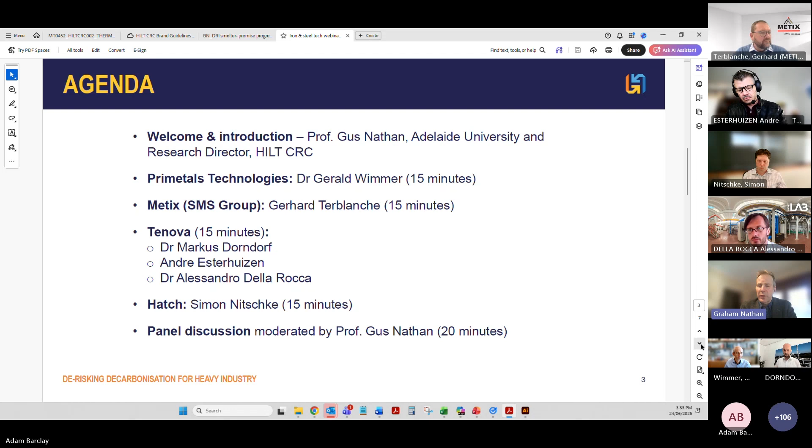Next slide please, Adam. First of all, Dr. Gerald Wimmer from Primetals, and you see that he's a very experienced presenter - we're great to have him here. He leads their work - he's the Vice President of Steelmaking, and he leads their work on green steelmaking, smelter technology. His expertise is in development, implementation and optimization of these processes throughout this field. He's previously held the position of Head of Technology. He holds a PhD in mechanical engineering and a master's in business administration. So please, Gerald, thank you, and over to you.

Thank you for the nice introduction. So I'm allowed to start this session. I'll share my presentation with you - just give me a short sign if it's okay, and you can see it in full screen mode in a minute.

Thank you. As I'm starting this one, I would like to start a bit with a broader picture of why we are doing all this. We are changing our industry, we are going green. So this will not be a small step - this will be a big step. That's why we call it a transition. So we have the green transition upcoming.

You might remember that some 5, 6, 7 years ago we had digitalization and Industry 4.0. Some people are wondering what's happened with this topic - was it completely washed away by the wave of green projects we are doing? We do think it's not the case. So we will have both - we will have a greener industry and a more digital industry. That's why we call this the twin transition.

And that's what I would like to present to you in the next 15 minutes. But to start with, and to start the session, I think it's worth going a bit deeper and having a quick look at the overall picture of our industry.

Why we are doing this. The reason you can see on this slide, on the very first line, we see the typical way how steel is made today.

Today, globally, 70% of steel is made via the so-called integrated route, using material preparation steps like a coking plant and sinter plant, and then the blast furnace to transform the iron ore. Australian iron ore plays a major role here, into hot metal, which we then refine in the converter to crude steel.

We need a lot of energy for this, and in this route almost all the energy comes from carbon. We feed the blast furnace with a lot of carbon, on one hand for reduction, on the other hand for heating. We collect the off-gas and convert it into electricity that powers the plant, so we hardly need any external electricity in a modern integrated plant.

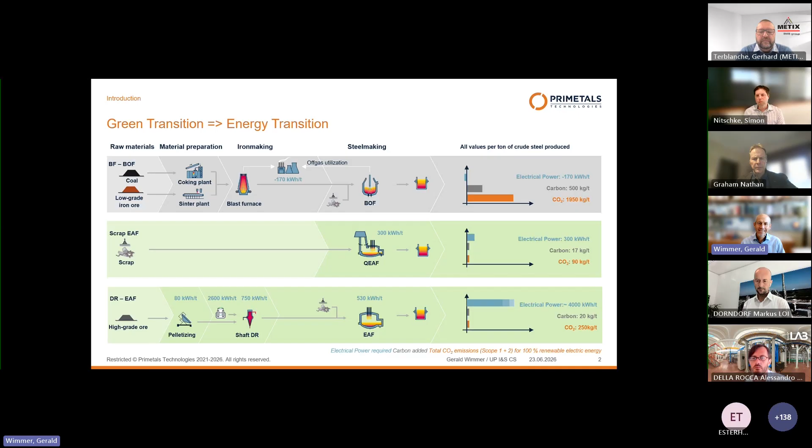So it seems pretty clear. We use as much scrap as possible, and the rest we do via direct reduction using common shaft technology feeding the electric arc furnace. Yeah, it's not that easy. If we have a quick look into the raw material side, here's a typical diagram. Primetals has been using this for quite some time, so you might already know it.

So we see here the global produced iron ores, transported ones, 1,500 million tons a year, an incredible amount. And you see on the vertical axis the iron content in blue and the gangue content in yellow. And of course, the gangue in the classical route using the electric arc furnace is becoming slag. So the higher the gangue content, the higher the slag amount.

And we see the very good iron ores here on the right with very small gangue result in reasonably low slag amount in the electric arc furnace, so the electric arc furnace can handle it. Nobody's happy about too much slag because slag in the electric arc furnace is reducing the yield, it costs energy, but as long as this amount is low, we can live with it and we can use it.

These low-grade iron ores and these medium-grade iron ores would result in very high slag amounts, 600 kilograms per ton. So the slag pot on such a furnace would be bigger than the steel ladle. And that's why these medium to low grade iron ores today are used in a blast furnace and they do not fit the electric arc furnace.

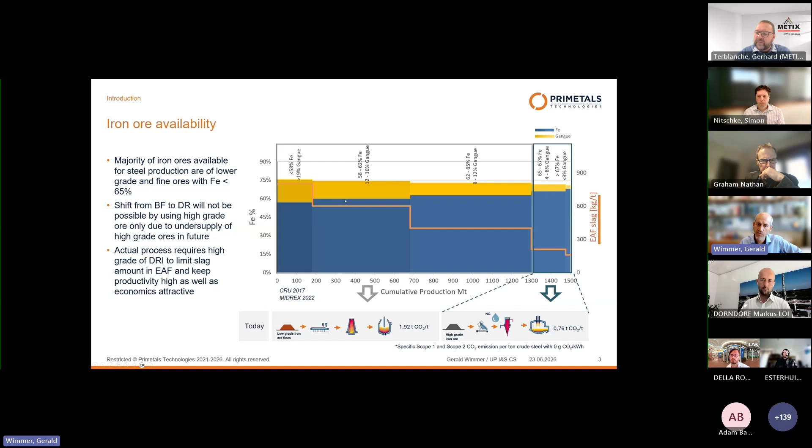And that's also explaining why this topic is so important for Australia, because most of the Australian iron ores are somewhere here. So today they fit very well to the blast furnace. They struggle to fit the common electric arc furnace.

That's why we have these new technologies under development where we use a furnace for low grade iron ores, but not an electric arc furnace, a new type of furnace. Primetals is calling it smelter. Others are calling it electric smelting furnace, ESF, or OSBF, open slag bath furnace. All fine for me. Let's see if we can agree on a name in future.

The only name we do not like to hear is submerged arc furnace, because with this highly metallized DRI, it's not possible to submerge the arc. You will create a shortcut and delete the arc. And with this very simple furnace where no metallurgy is done, we run on low basicity. We can also process these mid-grade to low-grade iron ores with a much lower slag amount. So slag amount stays reasonably low.

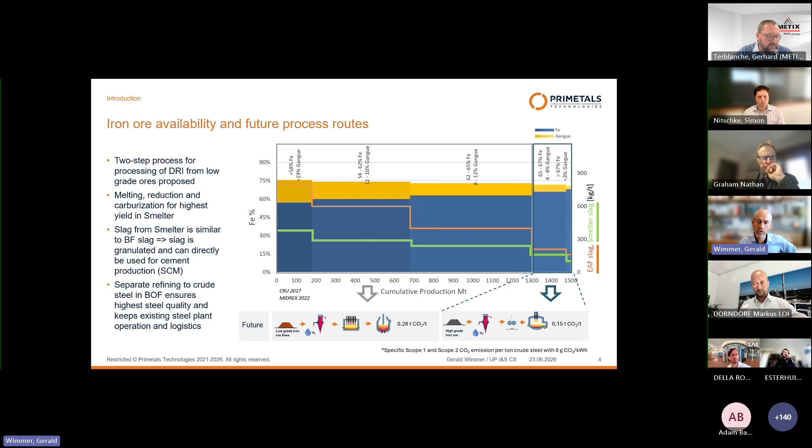And as this process in this furnace is very simple, we just do melting and final reduction. This slag is very comparable to blast furnace slag. So the slag still can be used in the cement industry and we do not get the problem of landfilling. So that's why the future green transition will not only include the classical route already known today and very successfully used in a lot of plants. Primetals is doing just one of these plants in Germany for Dillingen, Midrex shaft technology and modern electric arc furnace.

We will also need technologies that allow us to use low-grade iron ores, which is the majority of iron ores available today. And this requires this new type of furnace, which is a simple furnace just doing melting and reduction. No metallurgical refining work, and all the refining work we do in a dedicated aggregate, the BOF converter. And this also explains why this route with these two steps, smelter plus BOF converter, is very interesting for plants already having a BOF converter in operation, and especially plants having very large heat size that is not that easy to transfer to electric arc furnace, like for example POSCO, ThyssenKrupp or the Japanese plants.

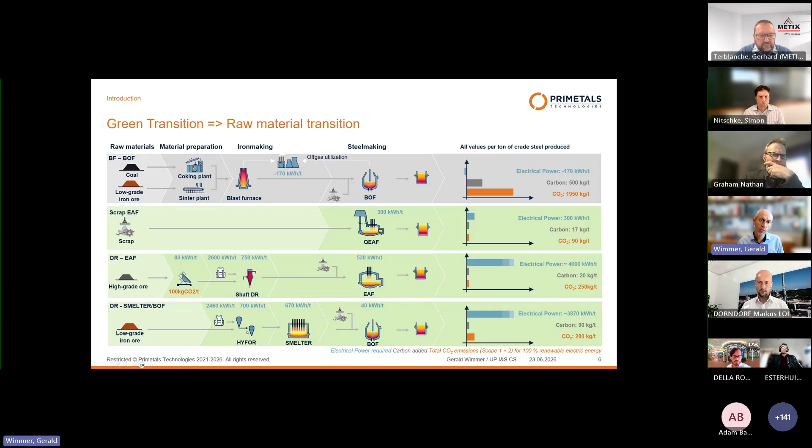And of course, there is further development. Why do pelletizing? This is again energy and CO2 emissions. Is there also a solution to do direct reduction without pelletizing? And here, this new fluidized bed technology developed by Primetals Technologies, HYFOR, is under development. A different way to show this green transition is summarized here.

So on the very left, we see the classical route where we have the material preparation. Then the blast furnace is a very busy guy. In the blast furnace, we do the reduction and the melting and then refining in the converter. While in this very new route, we eliminate the preparation step. We directly go to fluidized bed with the sinter feed without preparing it.

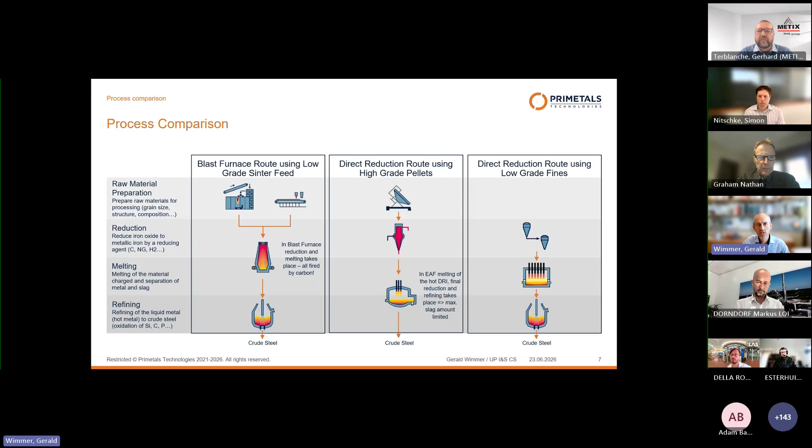And then we split. Instead of having one electric arc furnace that is doing melting, final reduction and refining, we split into two steps. So we have this new furnace, which is called smelter, for melting and final reduction. And we get metal high in carbon, which we feed then into the BOF converter for refining, so a two-step process in the steelmaking. That's the future process we think for Australian iron ores will play quite an important role. And that's then our prediction.

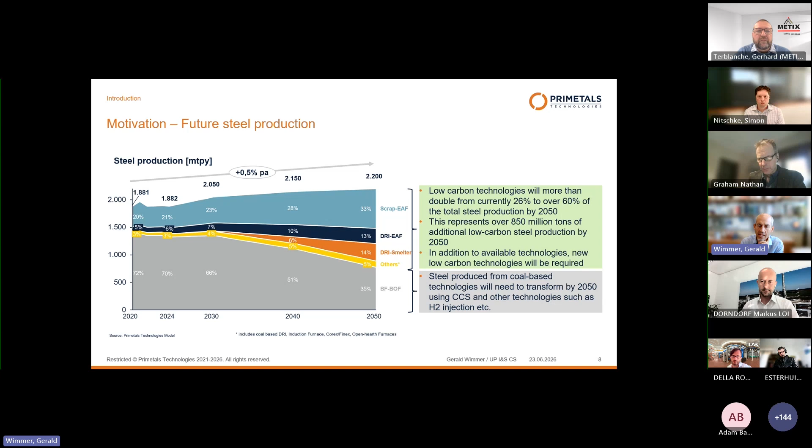and the rest will be based on DRI, where we have this classical route using high-grade DRI going to electric arc furnace and the other ones going to the smelter, plus some new technologies which are on the horizon. For example, electrolysis, high temperature, low temperature electrolysis, but here it's not yet proven to which scale this technology will ramp up. Quick outlook how Primetals is developing. So we have 4 processes under development.

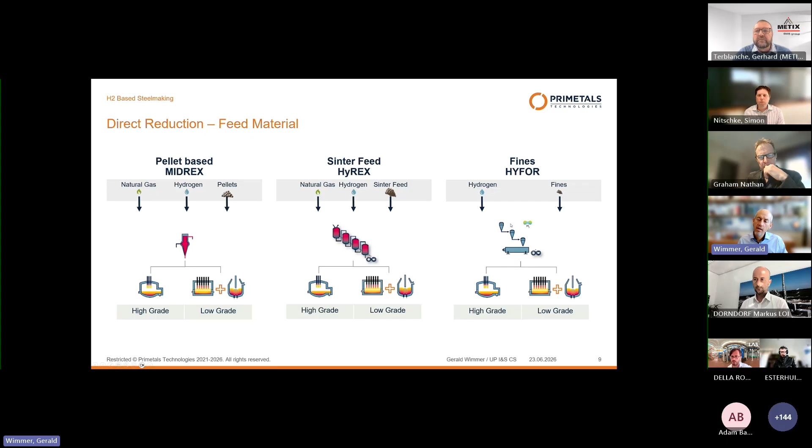Let's start with the HYFOR, where we combine direct reduction step using this new fluidized bed, where we use ultrafine material as an input. So very fine material with a grain size of less than 500 micrometers. Several reactors, material is reduced, and then we either compact it, hot compacted iron, or we directly feed these fine materials into the smelter, and from the smelter we get metal high in carbon. That's why we call it hot metal or iron, and a slag which is granulated and sent to the cement guys.

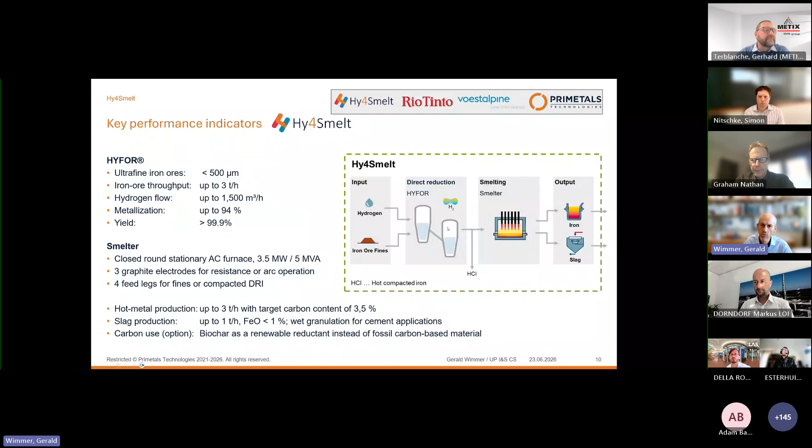And for this combination of HYFOR direct reduction plus smelter, we started a project called Hy4Smelt, which is financed by Primetals, voestalpine, the steel plant next to my office here, and Rio Tinto. So why is an Australian mining company investing in a demonstration plant just to prove Primetals Technologies processes? Because this will show that Rio Tinto's Australian mid-grade iron ores can be processed in such a route in a green way to produce green steel.

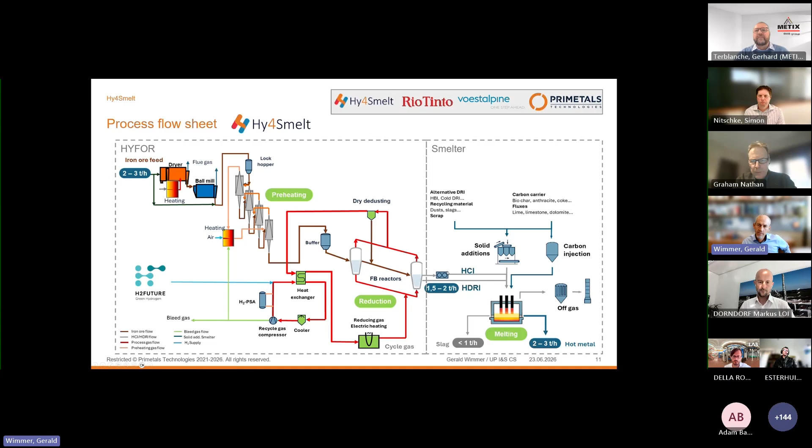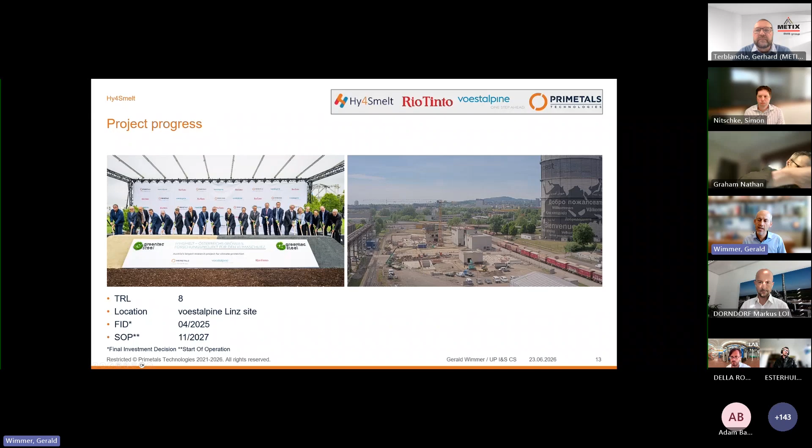Quick overview on the process sheet. So first step, of course, is material preparation. One minute, please. Preheating, and then we go to the smelter. The smelter is already known to the industry now. Just a quick representation how this looks. So it's a big furnace having a bath, which is continuous, and we continuously operate and tap it like a blast furnace. And this is now the realization. We had the groundbreaking last year. In wintertime, we prepared the land, and now the civil works are under execution. And we're now raising the building up, and first columns are going to be placed this week.

I mentioned digitalization. So it's not only green, it's also getting digital. Why? Because in all these plants where we have this new route, process in the first step is getting more complex. So we have a new process route in parallel to your old one, which is an advantage if you can use it well. If you cannot control the process well, then it's just a nightmare and a chaos.

And second reason is, when we do a new plant, a digital plant is less costly than an old plant with a lot of hardwired control boxes and control panels around. And that's why digitalization in the new plants automatically plays a role. One of the topics I like most is this mobile information support systems, where you have mobile devices.

Gerald, we just need to draw it to a close soon, please.

Yes, just coming to an end, where we have all this information then on the tablets available for documentation. And we will start up this Hy4Smelt plant next year in November, and hopefully in the next seminar I can then present first results.

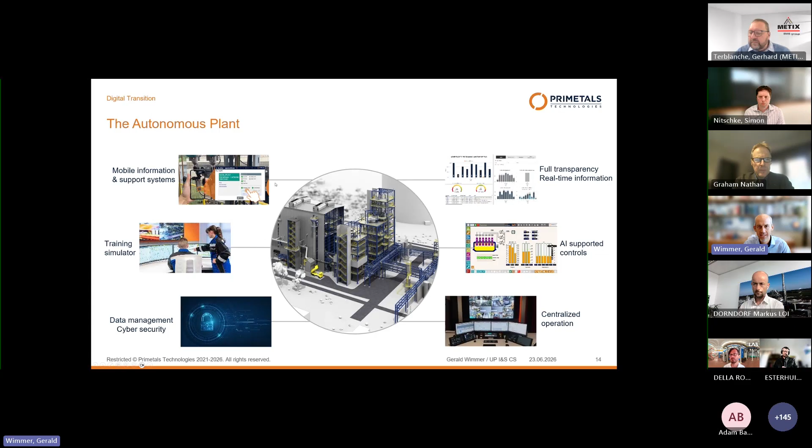So now we hand over to SMS Group, where Gerhard is going to give us perspective from Metix. He's a business development manager who started his career at Xstrata Alloys in 2001. He's had expertise in ferrochrome production-related activities, pre-oxidation and process understanding, extensive experience in AC/DC furnace operation, been in Metix since 2023, and he also graduated from South Africa in chemical engineering.

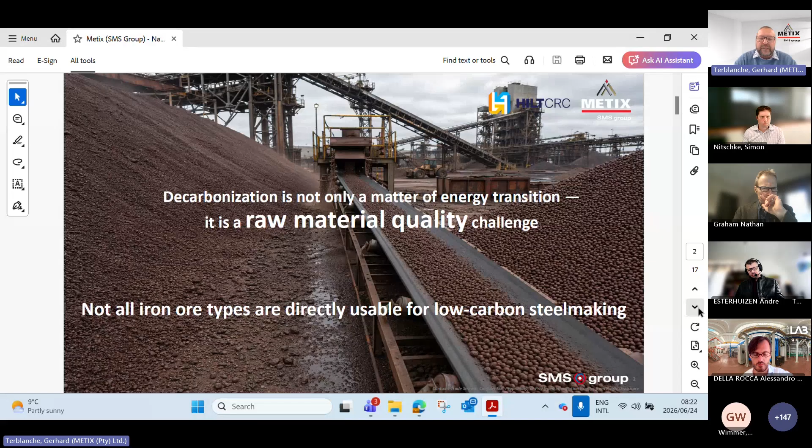As we all know, decarbonization is not only about energy, it's also about raw material quality, which is the challenge for most companies. However, we do see it as an opportunity. Not all ores are suitable for low carbon routes, especially the DR-EAF routes. There's an increasing reliance on high-grade ores or upgraded materials, especially with the EAFs recently being built and commissioned. The industry is shifting from energy only to energy and feedstock optimization. It's clear how Metix and the SMS group fits into this, but we'll get to that a bit later.

So what is the present situation? We all know that the steel industry is volume driven. It has been like that since the beginning of the steelmaking process, volume driven with flexible feedstocks. Mostly it was dominated by the BF-BOF route with a wide tolerance for different ores. The value chain was built on scale and logistics efficiency, and there were limited historical constraints on ore quality. However, we've seen significant change in that.

Considering the present situation, we need to understand what the future holds to design and supply the right equipment to fill this gap and the right technology to fulfill these processes. So the transition to energy and emission constrained systems, the growing role of hydrogen and electricity, as was also mentioned by the previous speaker, the preference for high-grade ores and scrap, although availability is getting less, and we'll see that on a graph similar to what was presented earlier. And also there's the regionalization of steel production.

So it's important to understand that you cannot just have one technology for all regions. It depends on what happens in that region, and on what the requirement is for that specific region and that specific client.

So the impact of transformation. I already discussed the shift to an emission-driven production model, which means low carbon or decarbonization. Obviously, this brings increasing OpEx and complexity. The margins in steelmaking and ironmaking are not as favorable as in other commodities, so OpEx plays a very important role. And then processing moves toward energy-abundant regions, where there's low-cost electricity; that's where the process fits in perfectly. And then there's a disruption of the traditional value chain, as we've discussed under the present situation.

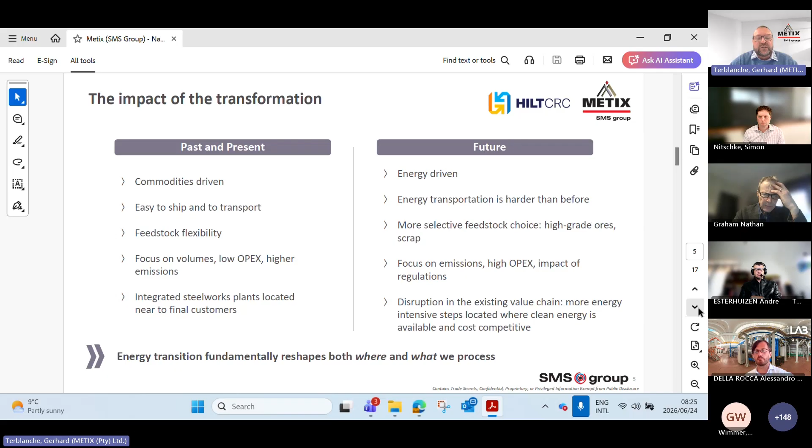So considering all of this, you need to understand what technology to apply in what region to decarbonize efficiently, while still looking at the right OPEX as well as the right CAPEX. As we go forward, you'll see where the SMS group and Metix fit perfectly into understanding the regions as well as what technology to apply where.

So in terms of global trade flows and the quality shift, as you can see from this graph, iron ore supply is highly concentrated from Australia and Brazil, while demand is dominated by China. We've seen that many times. High-grade supply remains constrained despite the growing demand, as you can see on the graph on the right, and that was also indicated by the previous speaker.

The market is not volume constrained, but quality constrained, and there's a structural gap emerging. That gap we need to understand, and that's the gap we need to fill with new technologies and new pathways.

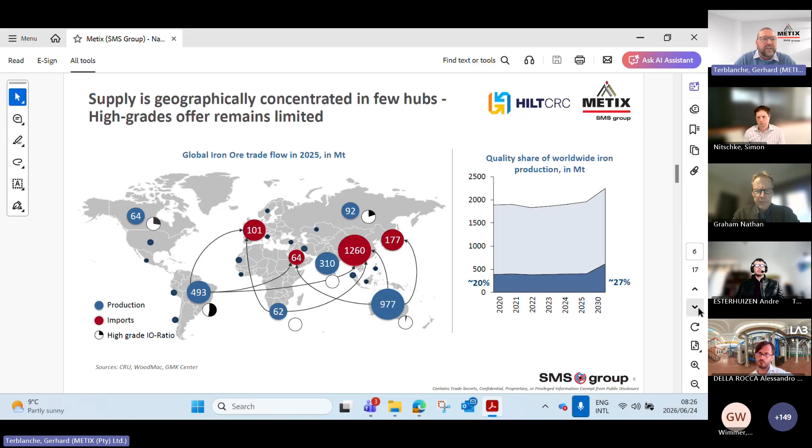Now, interesting enough, total production does grow modestly in terms of ore, but high-grade demand grows faster. DR pellet supply remains structurally limited, and that's a big bottleneck for the DR EAF routes. There's a clear mismatch between decarbonization demand and feedstock availability. Keep that in mind when we start looking at what technology to apply and how to apply it.

The nice thing about Metix and the SMS group is that our technologies are bypassing pellet dependence, especially looking at fines processing and different smelting routes, which we'll also get to a bit later.

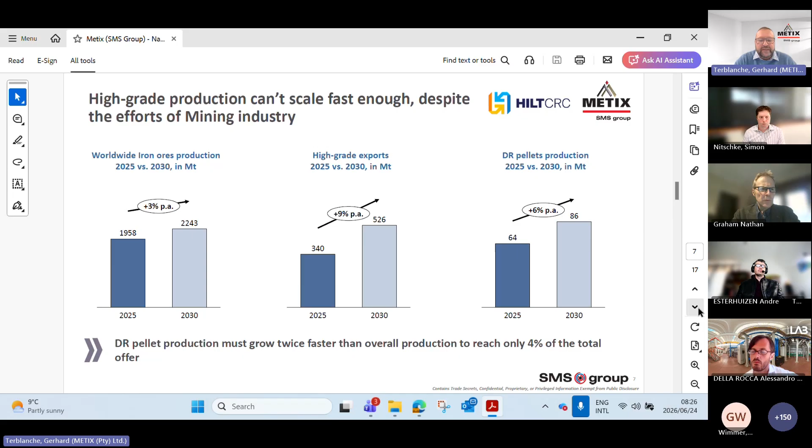Low-grade ores dominate, and we do know that. 80% of the global iron ore is low-grade and still growing in absolute terms. Low-grade exports are declining, which means that we need in-situ upgrading of this material at the source.

Decarbonization depends on unlocking low-grade ores economically. Unlocking a low-grade ore means that it must be economically viable, it must be efficient, and it needs to give you the same product and the same results as what we've seen from the blast furnace as well as the DR grade EAF route.

Good. So what do we have? Within Metix and the SMS group, there are different routes, as also discussed by the previous speaker. These three routes are the scrap EAF, the blast furnace BOF, and then the pellet-based materials, which we know can be high grade or low grade. So what Metix, as part of the SMS group, did is differentiate our offering across different routes.

We have the OBF, or open bath furnace, and yes, as the previous speaker indicated, there are different names for this. However, we do refer to it as an open bath smelting or open bath furnace, OBF. This OBF is a reducing furnace which uses electricity, but from this furnace we can produce the exact same hot metal and slag which comes from a blast furnace, which means it fits seamlessly into the current processes to replace the blast furnace.

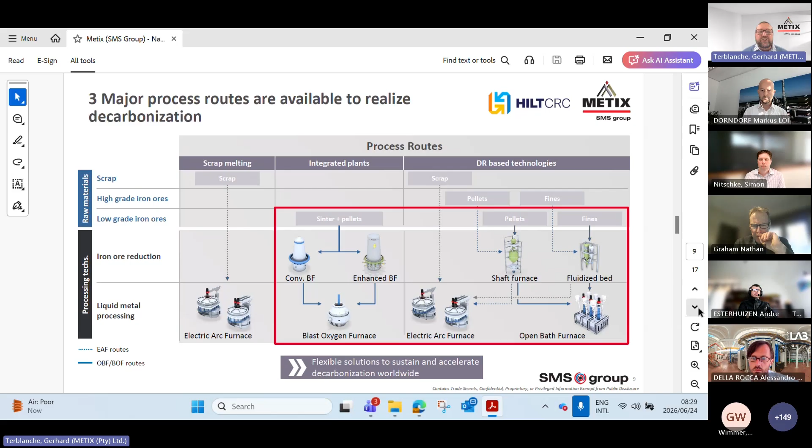Now, this is an important slide. Why do I say that? Because every region has a different drive. It's important that Metix and the SMS Group, as technology suppliers, understand what to do in what region. So there's no global optimum.

For Europe, it's cost and policy driven, as we know. For the Middle East, it's energy driven with a lot of DRI growth. China and India, we all know the BOF still remains dominant. And then energy and ore dictate competitiveness.

So from the SMS Group and Metix side, we have successfully de-risked each region to understand what technology to apply where. And again, within the group, we've also developed PAT, a plant assessment tool, which can assist you very quickly to make a decision in terms of OPEX of where to build what technology.

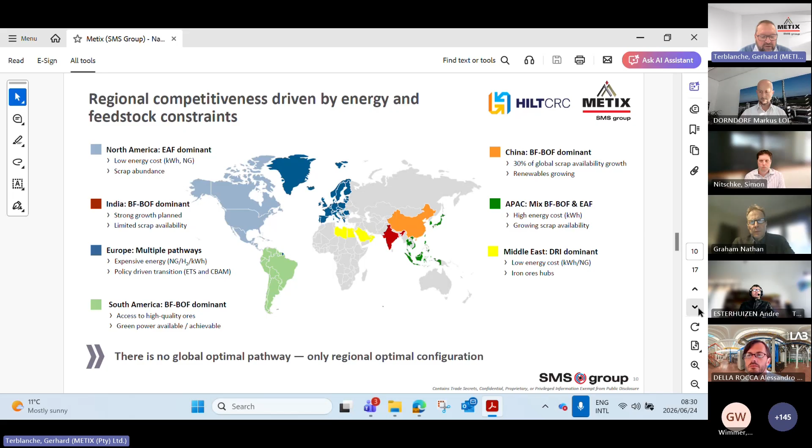Low-grade ores must be leveraged, and Metix has successfully developed our open bath furnace to utilize low-grade ores, also in a fine format coming from a pre-reduction unit, which is the CircoRed. There's also additional value from bypassing agglomeration, which is CapEx and OPEX intensive.

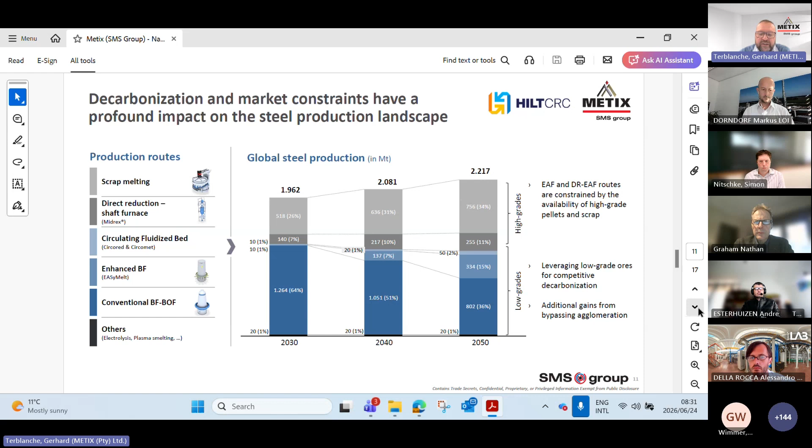Good. So, not to waste any more time, as I only have about 4 minutes left — what's quite key for SMS and Metix technology, and how we differentiate, is our CircoRed product, which is hydrogen-based. The nice thing about our technology is that it has been de-risked, the process up to TRL7 on our smelting capacity. We've done significant test work already.

Our pilot scale work has been completed. Our equipment is sitting on TRL9. On the CircoRed, which is a hydrogen-based fine pre-reduction unit, there are also references which you can go and look up. There's a reference plant which has been built in Trinidad.

So the product that we have is the CircoMet, where we have a one-stage fluidized bed reactor combined with our smelting furnace. Again, it's a bespoke and tailored solution which is already developed, and it will be per region and per client request. We normally don't just give one solution to everyone. So the CircoMet is available and de-risked.

And then also the CircoRed, which can be a two-stage fluidized bed process, also part of the SMS group offering, where you can feed from this to create an HBI or a DRI, which can be directly used in an EAF. This means we can utilize high and low-grade ores and feed into an EAF or into a smelting furnace, depending on the requirement of that specific client.

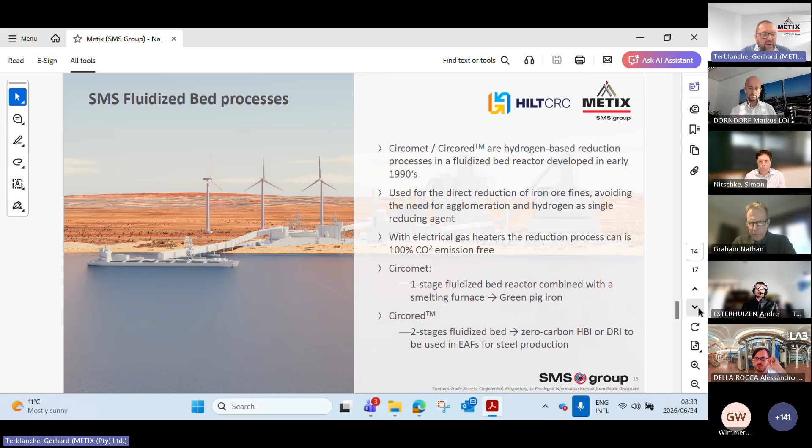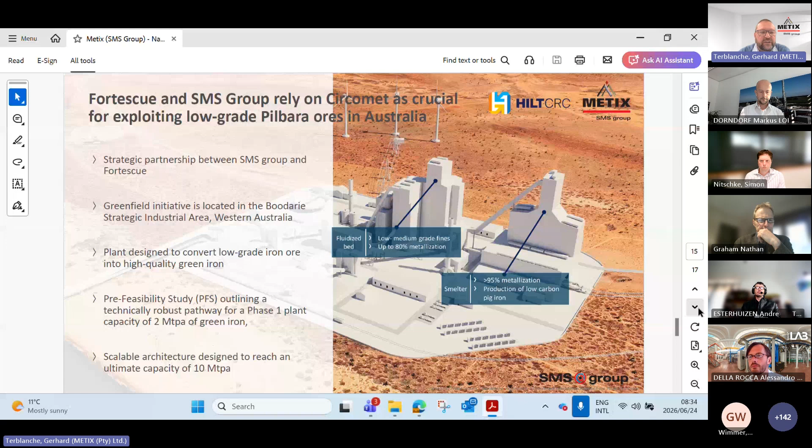So in conclusion, there's the market shift — it's quality, not volume, and it's a real constraint. Decarbonization requires integration of low-grade ores, clean energy, and flexible technologies. There's no universal solution, and Metix and the SMS group, as said earlier, design according to the region to have an optimal decarbonized solution with already de-risked equipment.

And this enables us to supply technology across the whole value chain, enabling low-grade ore to green metal pathways. Good, so that's from my side. I think I am within my 15 minutes.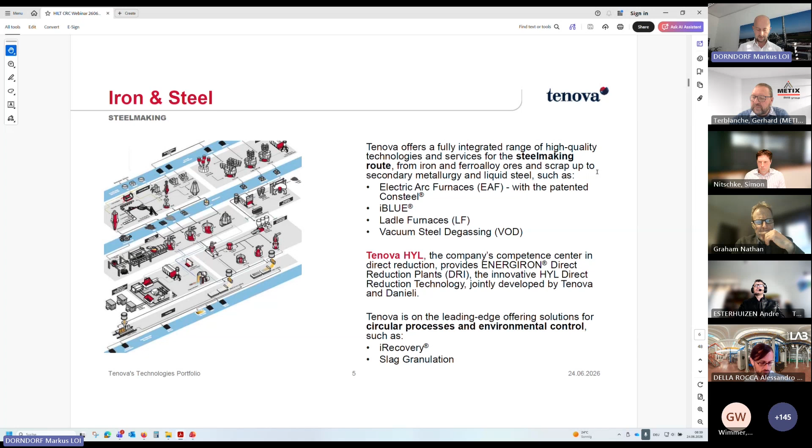Especially for the iron and steel making industry, Tenova offers a fully integrated range of technologies that supports the transformation of the integrated route towards green and sustainable production, especially from iron ore and ferroalloy ores to scrap and to secondary metallurgy and liquid steel solutions. We have different types of electric arc furnaces in our portfolio, an iBlue concept my colleague will refer to later, and also post-processing solutions for ladle furnace and vacuum degassing technology. We also have our own direct reduction technology, which I'll show you in a minute, and as said, our port equipment and bulk material handling is also part of our expertise.

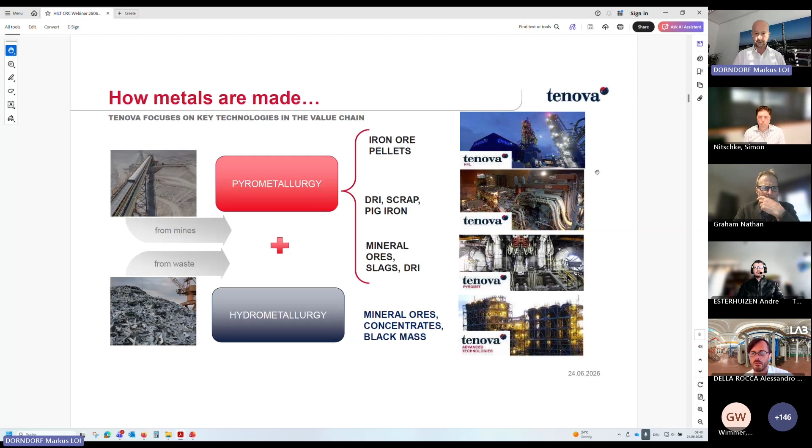As for how metals are made, I think all of you know about that. We have the ores, which need to be pelletized in order to use in our direct reduction technology. Under the big umbrella of pyrometallurgy, we also have solutions to deal with all iron units available, especially scrap, pig iron, and DRI, which we can produce ourselves. Another part of that is from waste hydrometallurgy, where we can create concentrates, mineral ores, or battery recycling, what we call black mass.

Where in the steel value chain can Tenova contribute to mitigate the carbon footprint? That's why we are so active in the decarbonization of the steel industry worldwide. With our direct reduction technology, we directly have the solution in hand to do CCU and CCS, but the main approach is to avoid CO2 emissions, what we call CDA, carbon direct avoidance. We also have a lot of technologies in waste heat recovery and injection systems. All of them are hydrogen ready, so we are already prepared for the far future when hydrogen will be available to a great extent.

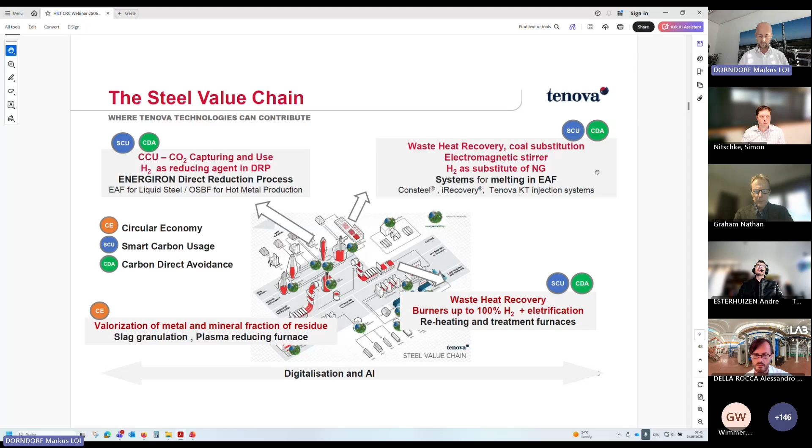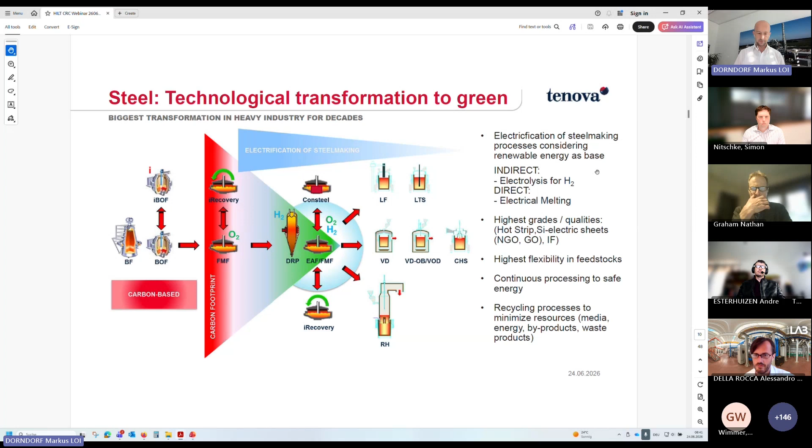This is what Gerald and Gerhard already presented. We are on a big path of transforming the steel industry, so we electrify the steel industry. Gerald made a very clear explanation on that, and we have explicitly designed our portfolio to support this electrification of the steelmaking process. These are the main steelmaking routes where we can support you and our customers.

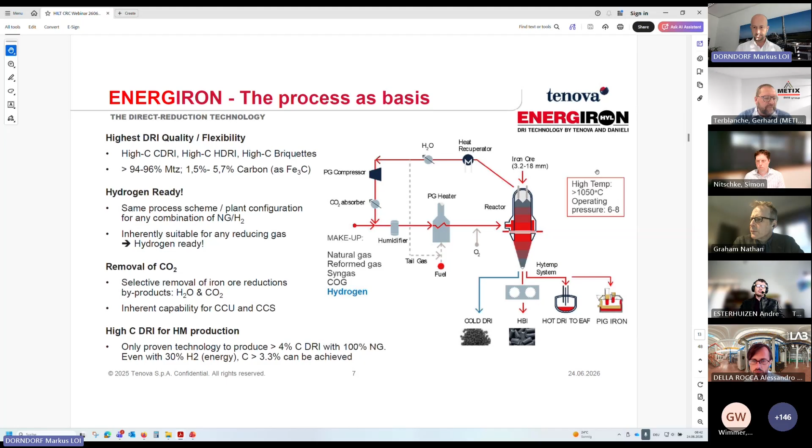We start with the Energiron process, jointly developed by Tenova and Danieli. This is just an overview of this cycle process. It's hydrogen ready, so we can easily switch between 100% natural gas and 100% hydrogen as reducing gas, and also use other reducing gases. This cycle process has a CO2 sink feature, meaning we take out the CO2 in a very pure gas composition, which we can use, for example, in the beverage industry, for a CCU approach.

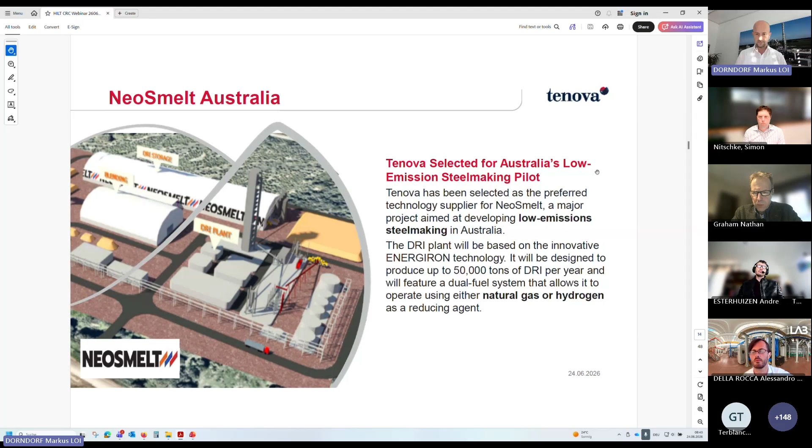That's why we have also been chosen by NeoSmelt. The main goal of this pilot plant, which we call a semi-industrial plant for NeoSmelt, is to test especially the Pilbara ores. Currently we are running a series of batch tests in Mexico, where the HYL mother company sits. With these batch tests using pellets containing Pilbara ores, we would like to better understand their behavior. Also recently, Rio Tinto published that they executed industrial tests in the Zero reformer plant in Baowu, and they are getting good results as well. So this is our contribution already with our DR technology in Australia.

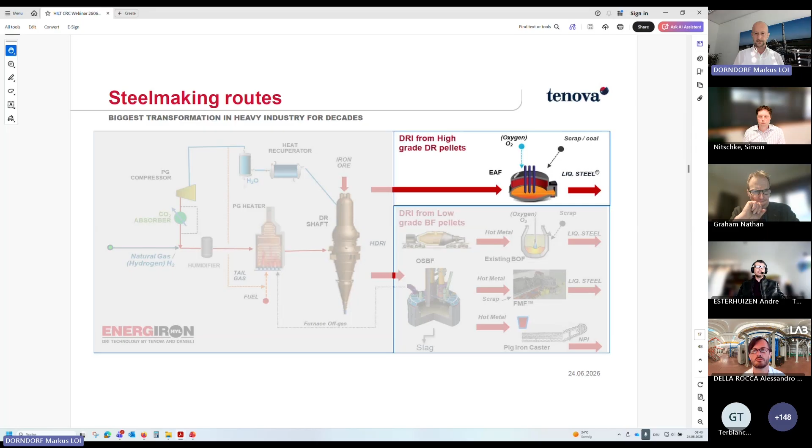As said, we have a wide range of melting technologies and aggregates, and before I hand over to my colleague Andre, I would like to explain a bit more about the electric arc furnaces. We have various solutions and concepts for melting iron-based materials and converting them into steel.

Within a basic top charge electric arc furnace, our main driver in this transformation process, also from the productivity point of view, is our ConSteel solution. This is a continuously fed melting furnace, or electric arc furnace, capable of producing up to 400 tons of liquid steel per hour.

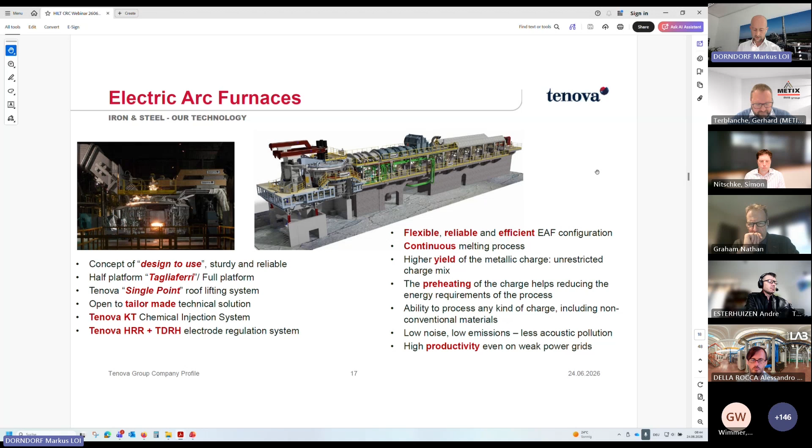With that furnace, we can easily enter integrated steelmaking plants and say: look, we can match the production capacity you ran before with blast furnace technology, and keep up with the electrified solution. We can provide electric arc furnaces with productivities above 2.5 million tons a year. This is a very specific technology we have developed over the last decades.

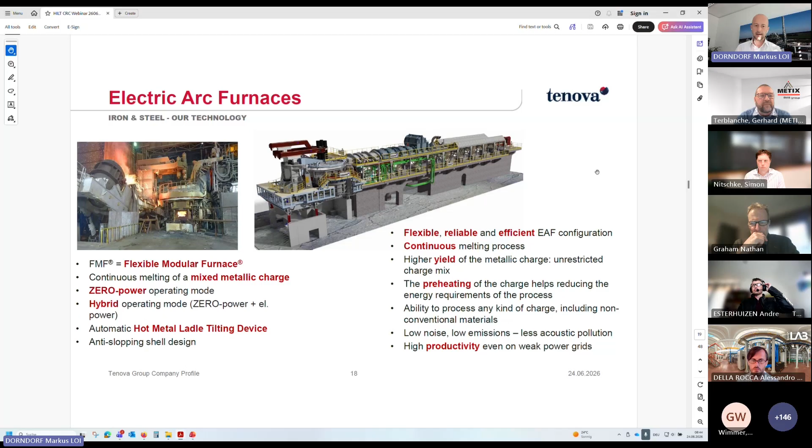But we also have other furnace concepts. For example, the flexible modular furnace, which is a hybrid solution acting as both a converter and an electric arc furnace in between.

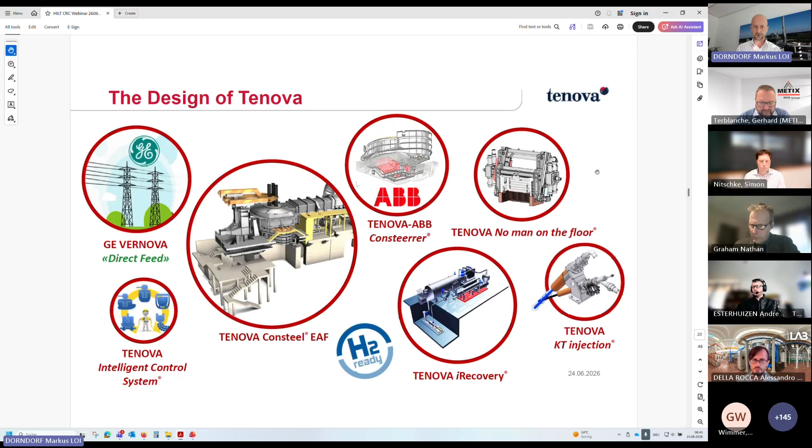As said at the beginning, we are a technology provider, so we mainly focus on the technologies that make this sustainability approach alive and bring us forward. We are very strong in technology, with no man on the floor, hydrogen-ready burner technologies, and also our own electric charging or input concept with the direct feed, developed together with GE.

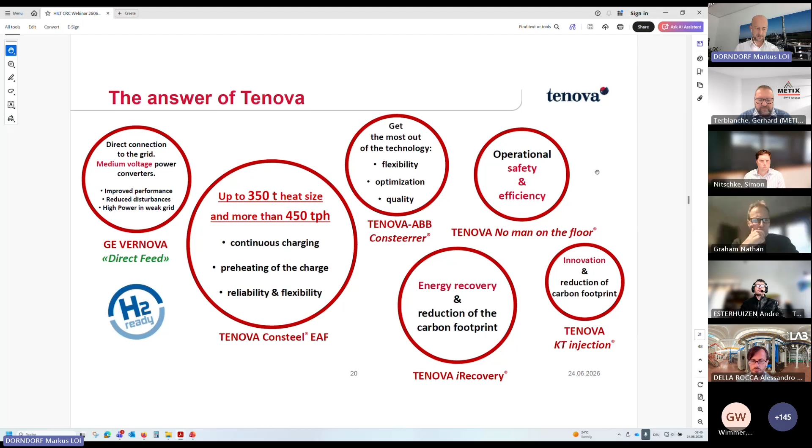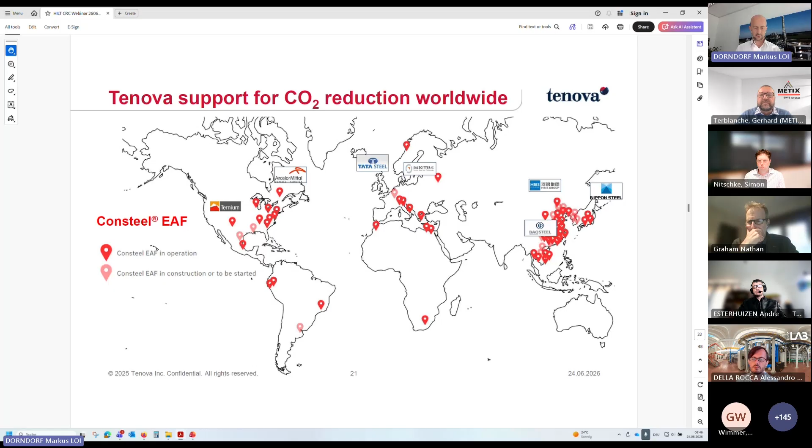This brings us a lot of advantages, especially here in Europe, where we are the main driver for this big transformation process of the integrated route. Our references show the world that this Consteel solution is the perfect match for the transition towards a green steel industry in the future.

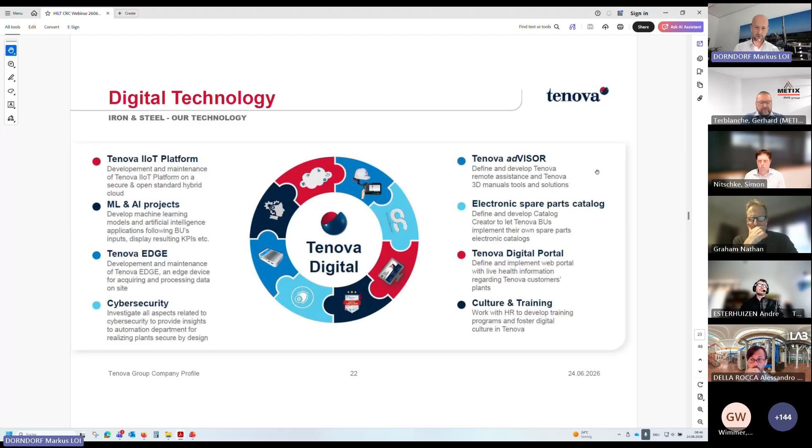But as my colleagues said before, a key aspect is, and will be, digitalization, data analysis, and the usage of artificial intelligence to make our facilities and processes even more efficient and transparent to our customers. We are very active and strong here.

All this together results in the main playing fields we are in. We have a lot of experience, especially from Europe, North and South America, where we drive this green transition. Now I would like to hand over to my colleague Andre, who will give you a more detailed approach to our smelting technology. Thank you very much.

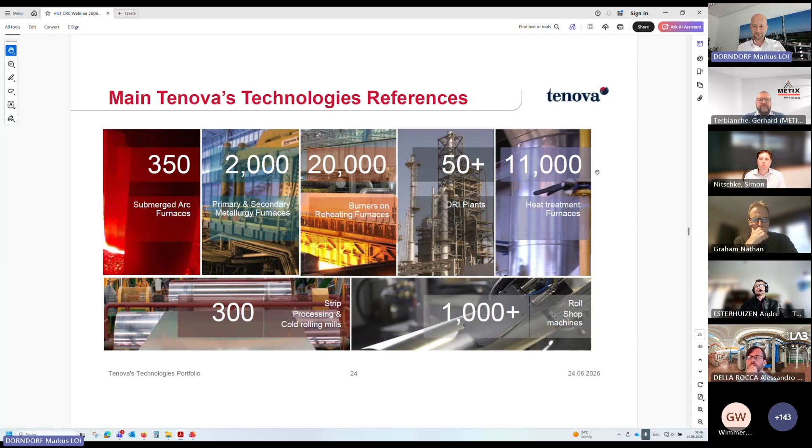I think I have to start off saying, for the audience listening, there is Tenova, Primetals, Hatch, and SMS participating together on this webinar. I like to refer to us as frenemies, because we are extreme competitors, but at the same time we all have this common goal we are working towards. A high tide raises all ships, so we all get along very well.

Now, Dr. Wimmer, Gerhard has explained so much on the long-term primary focus and the challenges the industry is facing. I just wanted to take a short left turn, looking at the timelines my colleagues have shown, where we're talking about 10, 15, 20 years into the future to really turn this industry around. There's also a need for what I call complementary technologies that we need to focus on.

Just two of the technologies I wanted to raise today are slag treatment and HBI or DRI preheating. Markus has explained our experience with direct reduction technology. Electric arc furnaces are shooting up all over the world. Open slag bath furnaces, as an engineer, it's probably the coolest thing I've worked on in my 20 years as a pyrometallurgist, but it is so damn complex and expensive. When we're talking about a market where profit margins are measured in cents per ton sometimes, we really need to tread carefully on how much the new technologies we develop cost.

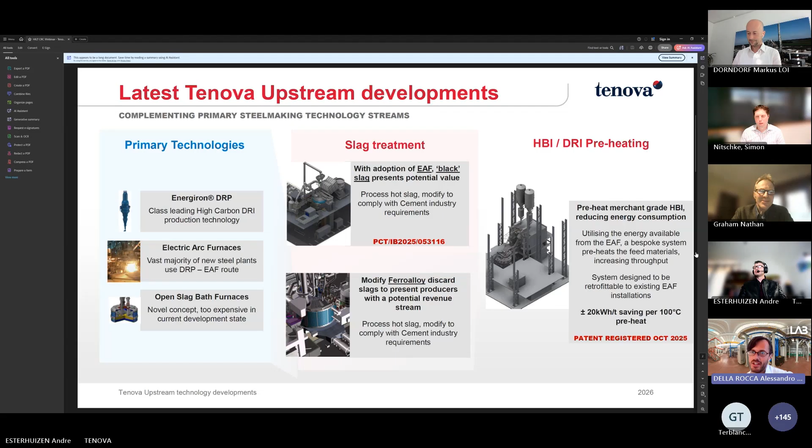Let me finish this overview, giving you an idea of what's coming up next. We talked about upstream liquid steel production. Now it's also a good idea to look into downstream, which means essentially hot rolling of semi-finished products. Tenova has also developed a portfolio of downstream decarbonization technologies for reheating and heat treatment processes, organized into three main areas.

The first one is related to efficiency improvement, essentially having regenerative combustion as well as high temperature air preheating, and possibly high temperature fuel preheating in the case of very lean fuel gases, such as lean blast furnace gases. This may be particularly relevant for getting the first 20% of CO2 reduction.

And then, for further reducing total carbon footprint, there is for sure the possibility of looking into green hydrogen combustion. We have developed a good flameless solution for that. The idea is that the combustion system can be used as a totally flexible user within the hydrogen supply chain, meaning no hydrogen storage needs to be provided on site. We believe this is really a huge simplification, both in terms of insurance cost and safety works required.

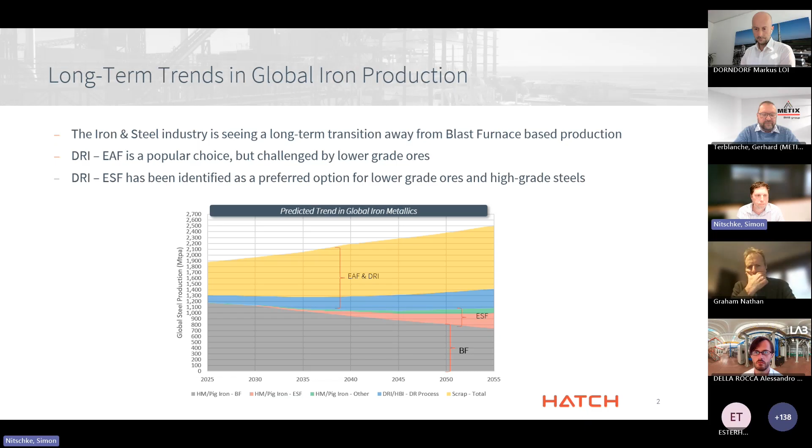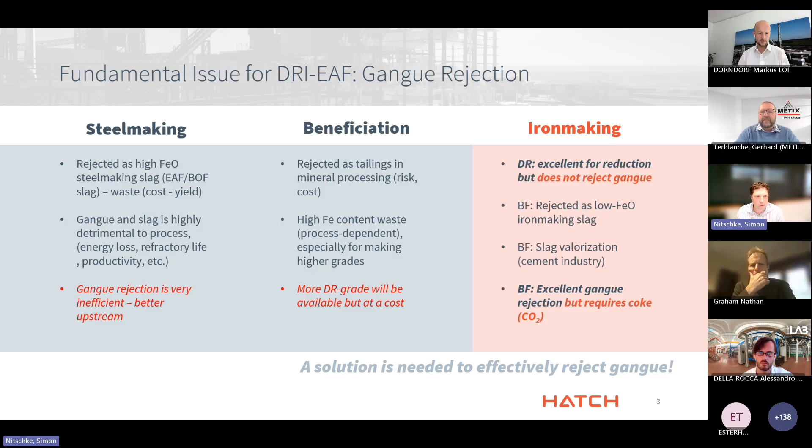Again, the iron making challenge around low grade ore is fundamentally about gangue rejection. We've heard a lot of information about that, so I won't go into a lot of the details on this slide. And in preference, I'll skip to how we in Hatch look at ESFs fitting into this flow sheet. So the good news is that ESFs do provide us with equipment capable of rejecting that large amount of gangue in an efficient manner and at the volumes comparable to blast furnace operations today. And therefore, they really do represent a very credible alternative pathway in the future.

So our teams have always found it useful to see DRI ESF flow sheets as simply splitting the combined pre-reduction and smelting processes that are normally all completed within the one vessel of a blast furnace into those two separate process steps, the pre-reduction in the upstream direct reduction furnace, and then the electric smelting furnace being able to complete that work and achieve the challenge of that gangue rejection that we talked about earlier.

Now, with our experience in designing and building some of the largest electric furnaces in the world today, we certainly recognise the importance of not only the equipment technology itself, but looking at the layout of the smelting facilities and how that integrates into a smelter that's capable of handling the capacities that make it credible for blast furnace replacement. And so we've looked in detail at a couple of different layout options. We see credible opportunities for coupling a single 2.5 million tonne per annum DRI facility upstream of 2 ESF furnaces, or alternatively for even larger capacity throughputs, perhaps 2 DRI units into 3 ESF.

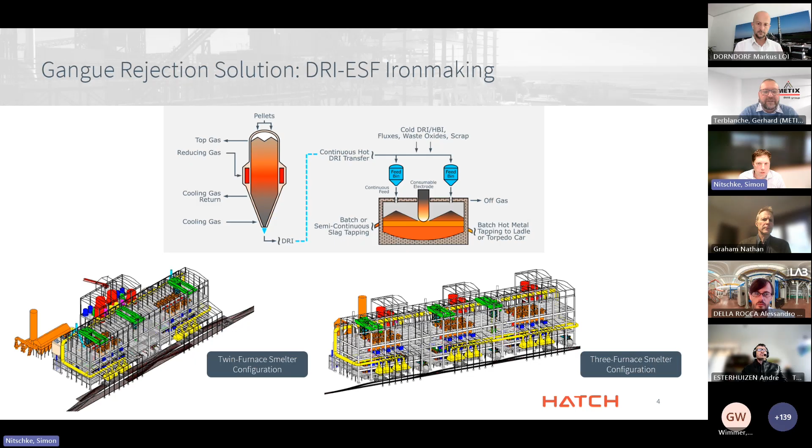Now, in terms of the CRISP Plus furnace itself, the fundamentals of this equipment design are not new. Hatch has been designing, developing and refining the components of stationary, high-powered, large-scale smelting furnaces in the non-ferrous and ferroalloys industries for more than 70 years. Many of those component-level technologies originally developed have direct applicability to iron-making ESFs, and they can benefit from all these developments in the past. And each of these features we've incorporated into the overall CRISP Plus furnace design that we're now carrying forward as our offering in this space.

Now, we see a lot of these component level technologies as very critical to the long-term successful operation of CRISP Plus at scale. And I just wanted to mention a couple of them briefly. We've heard from others about the importance of producing high-value slags, very similar to what comes out of a blast furnace. And that's certainly possible as part of ESFs. Perhaps most importantly is the combination of an active binding system that provides constant sealing on all of the refractory lining in all three dimensions and allows us to thermally cycle the furnace as necessary for maintenance activities and long campaign lives.

We've got tight sealing of that upper gas space above the liquid bath, and that's important for providing a CO-rich off-gas stream and opening up the possibility and value of integrating low nitrogen steel productions out of ESFs. It's continuous operation, as we've mentioned earlier, which leads to high availability and less complexity in terms of integrating into industrial power grids, particularly weaker grids.

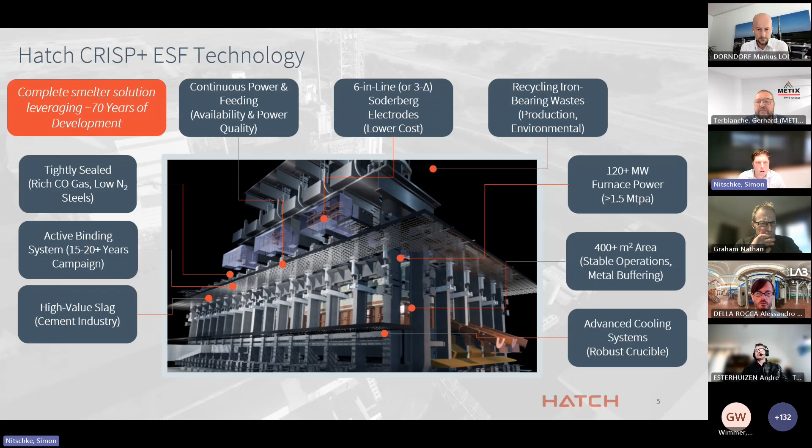So at Hatch, we focused on 3 pillars of work that really ground us with the confidence that ESF technology is ready for deployment in commercial DRI ESF flowsheets in the very near future. The first is around fundamental processes being demonstrated in existing iron making or electric iron making references. So we said earlier that electric smelting is not new, and in fact, even in iron making applications, there's several industrial examples that are in operation. And while most of these relevant examples are 40 megawatts or less, it's important to recognize that we certainly have ilmenite applications operating up to 80 megawatts today. So that gives us confidence that the fundamentals do actually work at scale.

From an equipment technology and design perspective, we've got industrial commercial scale demonstrated in adjacent industries already at the scale that we're talking about necessary for ESFs. I mentioned in non-ferrous, we've got industrial examples which are much closer to that necessary scale at almost 100 megawatts today. And they're physically at the geometry that are required for what we see as that commercial scale CRISP Plus furnace. And it's really this that gives us the confidence that the equipment technology itself is ready to support that genuine blast furnace replacement. Particularly when you start to consider that a lot of that key componentry around the long campaign life that will be necessary on ESFs is already incorporated and demonstrated on those very large non-ferrous furnaces, including the cooling elements and the active binding system.

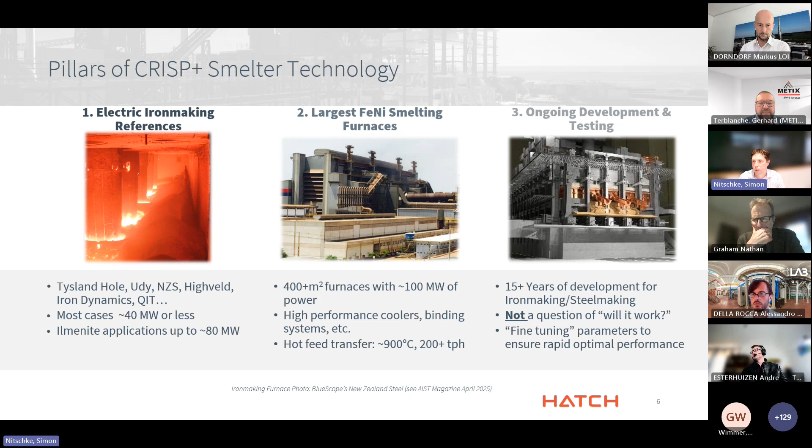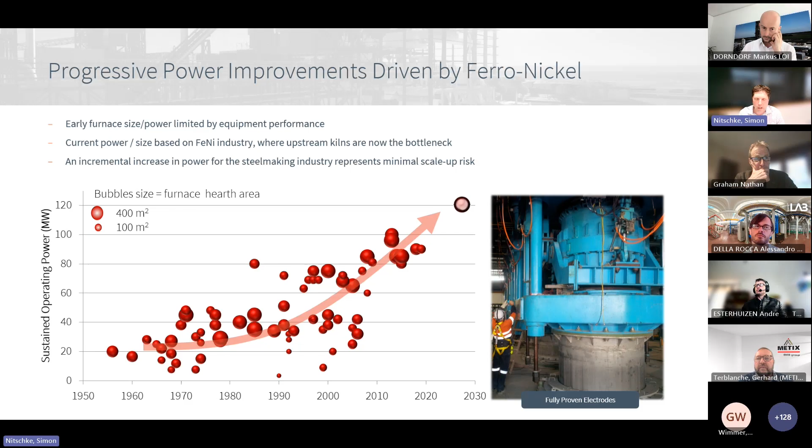That smelting intensity is typically compared on a kilowatt per square meter of hearth area basis for electric smelting. And otherwise, this limit is certainly within the current density of the electrodes, which are capable of handling the current density needed for 120 megawatt operation. And certainly at that 400 square meter mark of physical furnace size, well within the hearth smelting intensity limits as well. So I'm certainly confident that the scale is within reasonable technical risk profiles moving forward.

So the first is really around the iron making examples. They're certainly on the lower end of the power level as I described previously. However, they do still provide us with that confidence in the fundamentals. And that's really the part that they're playing there. And most recently, they've proven to be really important industrial examples that have allowed us to further de-risk the fundamentals as we look forward to the future in scaling ESF technology.

And finally, as we approach some of those highest power examples in ferronickel at least, our designs are already demonstrating that 100 megawatt mark and certainly provide solid operating confidence that not only those smelting densities are practical, but also in terms of the operating windows for practical considerations such as slag handling that's already well known to those non-ferrous operators and can be brought across to ESF operation very easily.

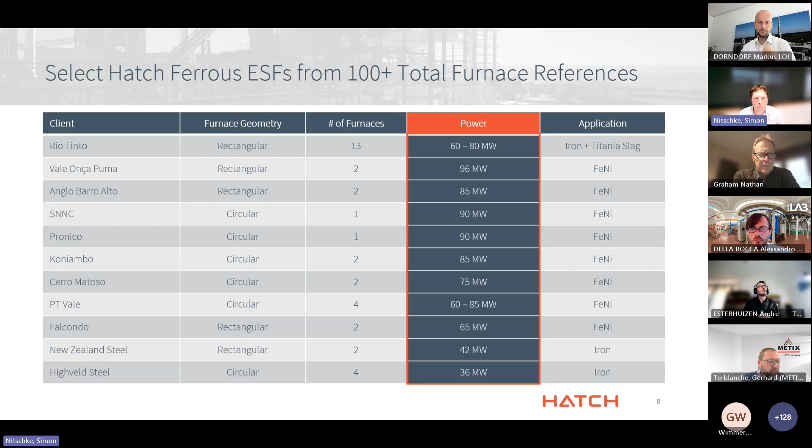So shifting to that third pillar of refinement and demonstration, there's two aspects that we're focused on here. The first is that we've established an ongoing lab scale facility supported by our team in Johannesburg. And the focus of this work is really around the development and refinement of feeding techniques using both natural gas and carbon-free DRI, and the resultant carburization of the hot metal that we're able to achieve out of that smelting process.

And based on this work, we certainly believe that this fundamental testing remains critical in confirming expected carburization levels, and certainly the feeding patterns will be one of the most critical design refinements necessary during the early commercial demonstration of ESF technology at scale. Hatch hybrid feeding is a technique and arrangement that we've shown results in higher carburization of that hot metal, and we're continuing to refine this knowledge base through this fundamental test program.

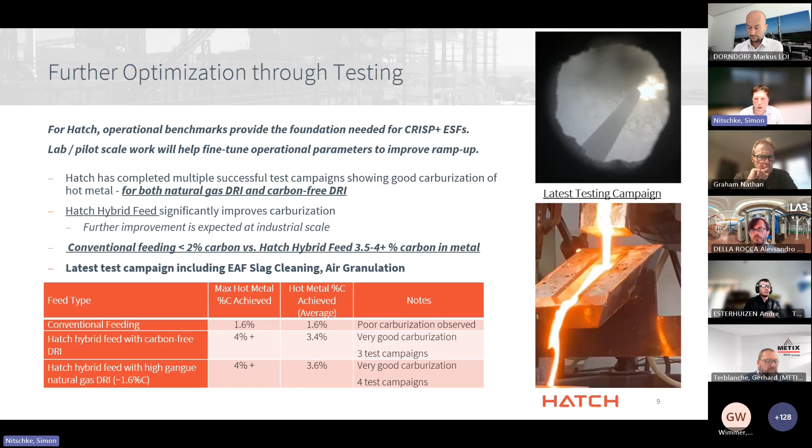Finally, our third pillar is also critically supported by our involvement with projects like NeoSmelt. And you heard Tenova refer to their DRI equipment being also incorporated into NeoSmelt, and we're happy to be a part of this project as well. It's a joint venture between BHP, BlueScope, Mitsui, Rio Tinto, and Woodside to demonstrate DRI ESF using Pilbara ore.

And the Hatch Crisp Plus furnace designed specifically for this project will be a 9 MVA, 7 megawatt single phase AC furnace using 2 graphite electrodes. And importantly, it's intended to be a third slice representation of what we believe the commercial Crisp Plus furnace will look like. So it's very important from a scaling perspective to have it at the size that it is.

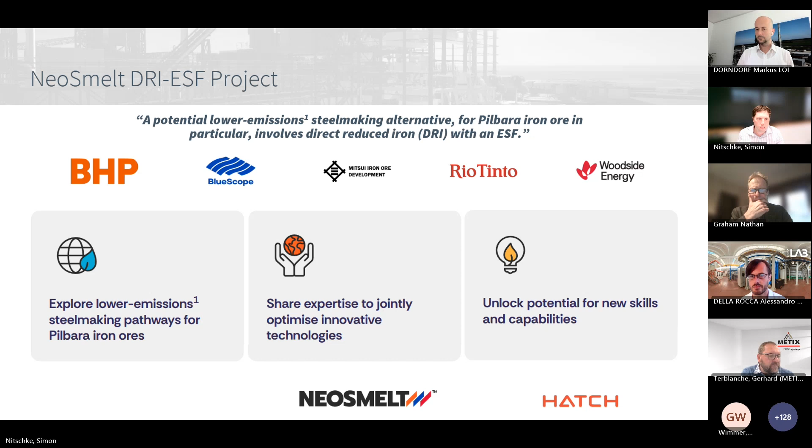And really what we see in this project is a unique opportunity that's brought together 5 industry-leading partners along with 2 very critical OEMs, but also importantly leveraging the operating experience of BlueScope, both from their Port Kembla operations as well as their New Zealand steel operations. And it's the combination of all that that really sets NeoSmelt apart as such a critical demonstration project in this new space.

It's an enormously important project for Australia. It's certainly in terms of Australia's green iron ambitions, but I would also suggest for the iron and steel industry at large. There's a lot of eyes on this, and it's important that this demonstrates that flow sheet as an early example of pathway to commercial success.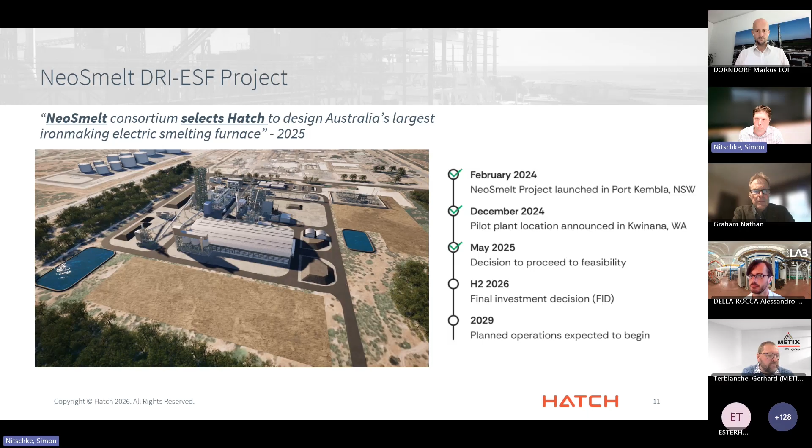So finally, just some conclusions. Certainly, we see CRISP+ electric furnace technology as an effective equipment option for that low-grade iron ore process route in particular, and therefore its applicability to Pilbara specifically. Electric iron making technology is not new. We've got lots of examples, both historically and currently operating, where we can get some confidence in the fundamentals that are at play here.

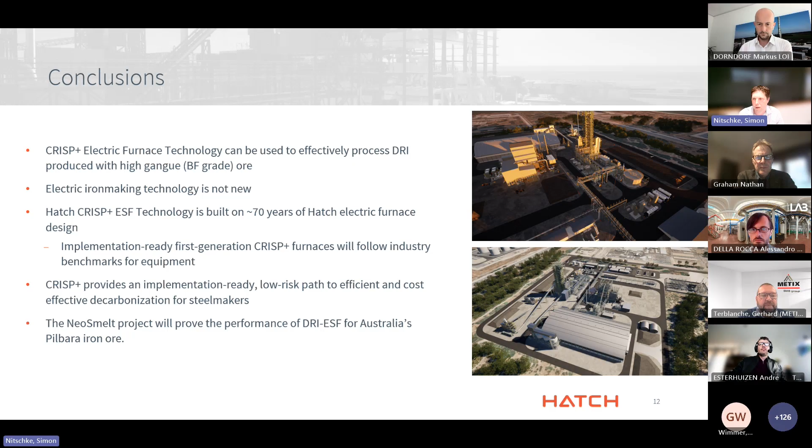Our technology, that CRISP+ technology, is built on many, many years of electric furnace design in adjacent industries. And we really see that technology providing an implementation-ready example of ESF equipment ready to drop into those DRI ESF flow sheets. And finally, the importance of that NeoSmelt project can't be underestimated from our perspective. It really will be one of the first opportunities to prove the performance of that alternative flow sheet at scale using Pilbara iron ore. So very excited to be part of that.